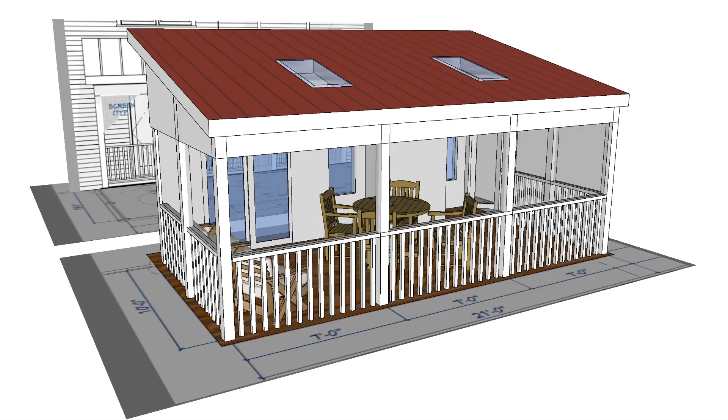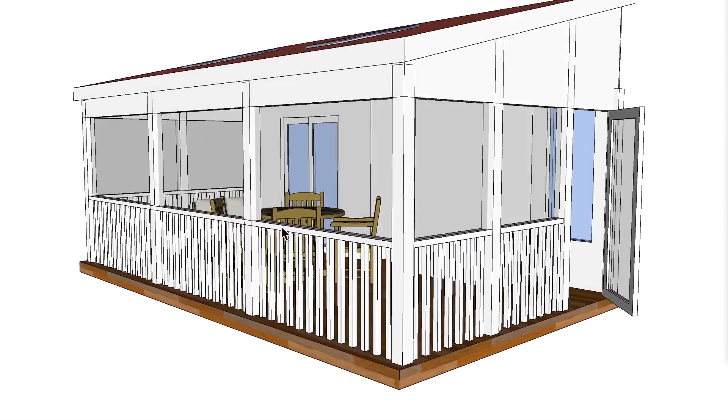Now let's get heating. All right, so here we have this covered patio with a screened-in room area. This is a residential application. Let's go ahead and look at any obstacles we might have. So first of all, we have a fan here in the center, and then we also have some, I believe, recessed lighting fixtures inside here.

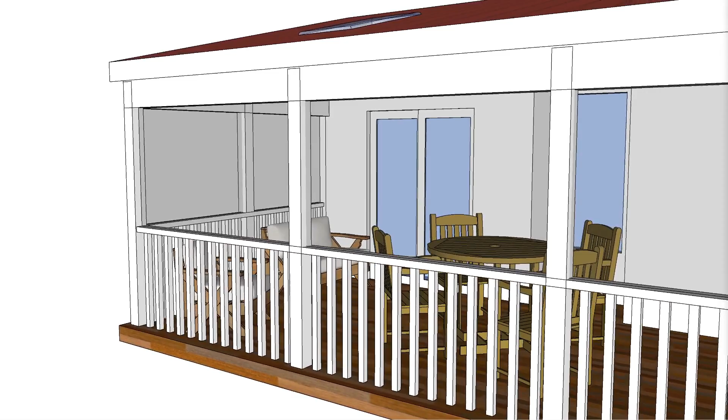And then also we do have a doorway that slides left to right, and of course there are screens on this screened-in patio. I'm going to go ahead and turn off the screens. It's just easier for me to maneuver through there, but there are screens there. We have some skylights up here that we need to be aware of. Obviously, we don't want to obstruct the lighting coming in from the skylights as well.

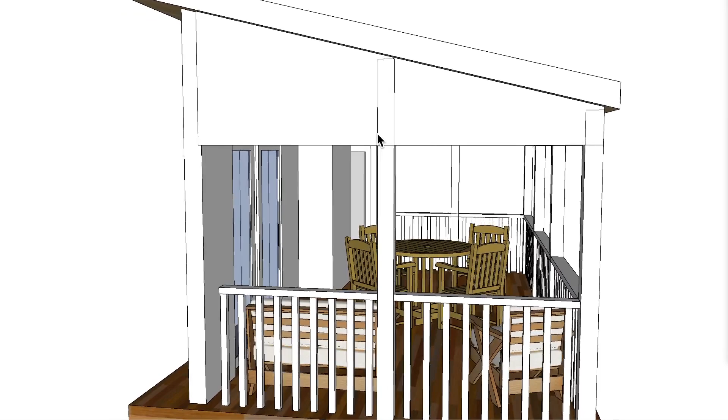So not sure about the configuration of the side elevation right here, for instance. This could be open, it might be closed like I show it here, but hopefully it'll be closed so that we can make some attachment points. So if that's changed, we'll come back and rearrange that.

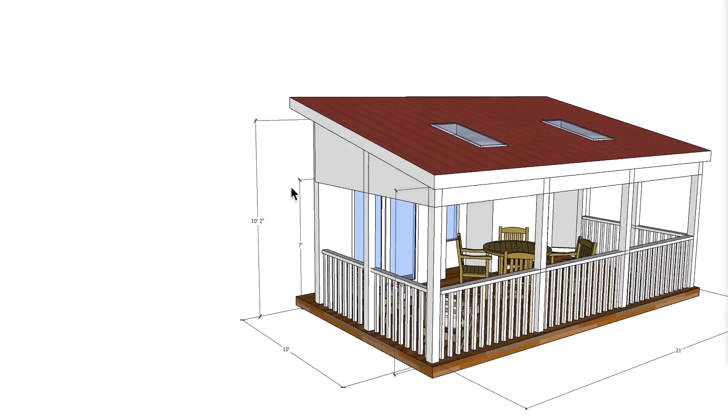So all right, let's go ahead and look at the overall dimensions here. Basically, we've got 21 feet by 10 feet. We have a height at the top of the ceiling up here, which would be inside here, I have that at 10'2", and the ceiling height right here, I have it 7'8" 3/8. Back here, I have the doorway at about 7 feet off the finished floor, and then we do have the swinging door that goes to the outside as well. And I think that's about it.

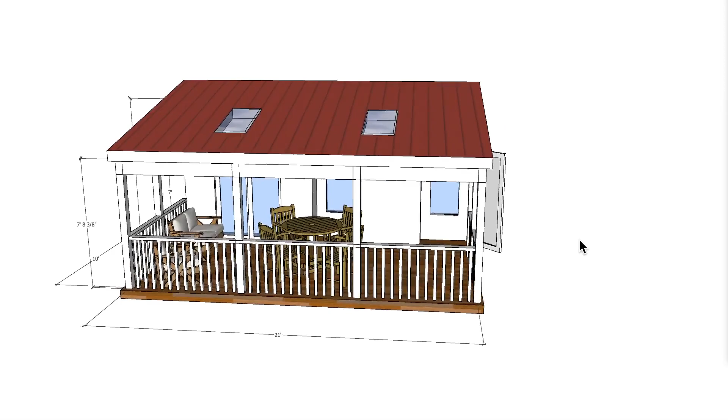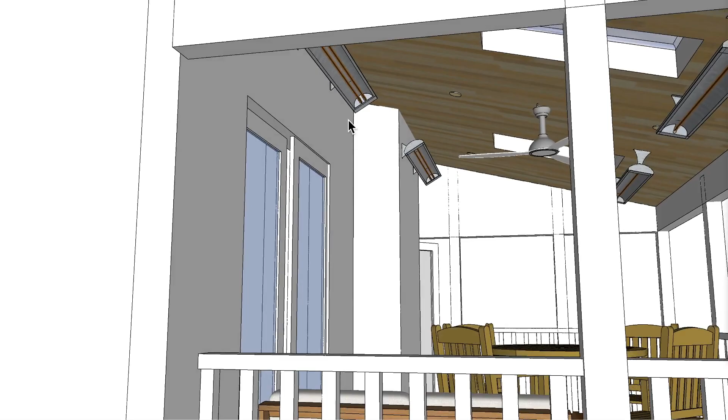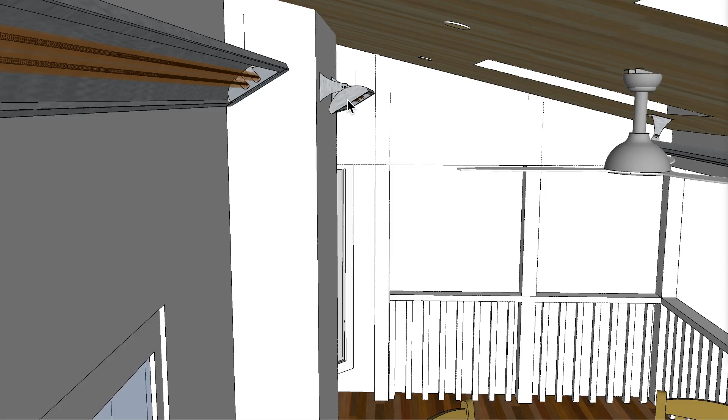So let's go ahead and turn that off and go with the first option that I looked at as a possibility, and that would be to mount some units similar to this. So what I have here is two of the CD 6,000 watt units. I have them at a higher elevation. I've taken the heater itself, and from the top of the heater up is 12 inches. I have this at a tilt, from straight down, it's 30 degrees, sorry about that. From straight down to the ground, 30 degrees up.

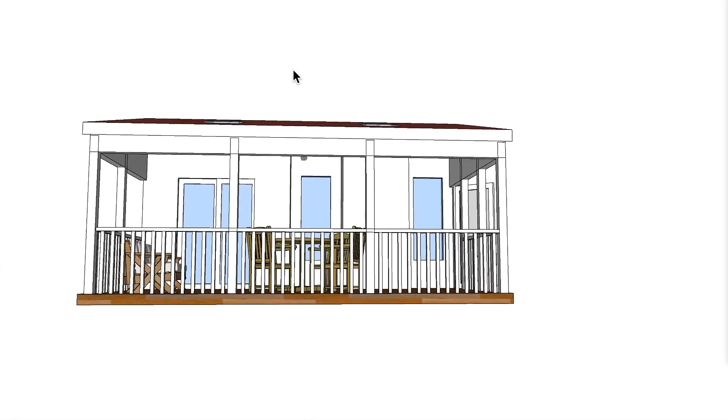And also just note that, because the ceiling height is a little bit higher up here, I was able to move this one up just slightly higher than this one over here based on the fact that there's a drop right there. So those are two 6,000 watt units. The placement of those two units is 4.5 feet from center of the room to center of the heater, and from center of the room this way, 4.5 feet center of the room to center of the heater.

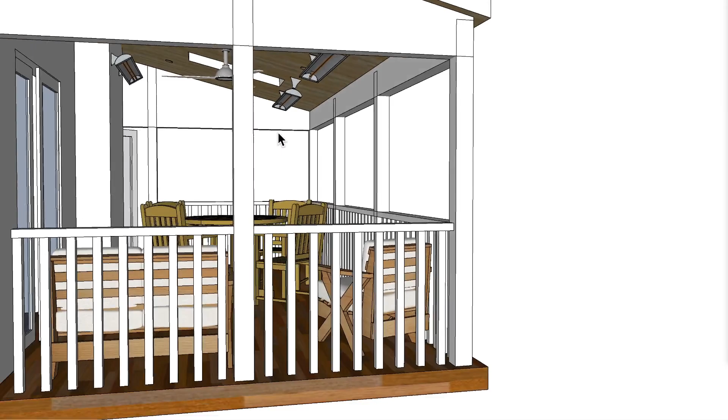And then over here, what I've done is taken two 4,000 watt units. I chose the 4,000 watt units just because of the fact that they are going to be slightly lower than this, almost a foot lower. What I've done here is made sure we're at the same slope as the ceiling. I have the same slope with the contour of the bottom of the heater itself. So I'm using the OEM bracket on that.

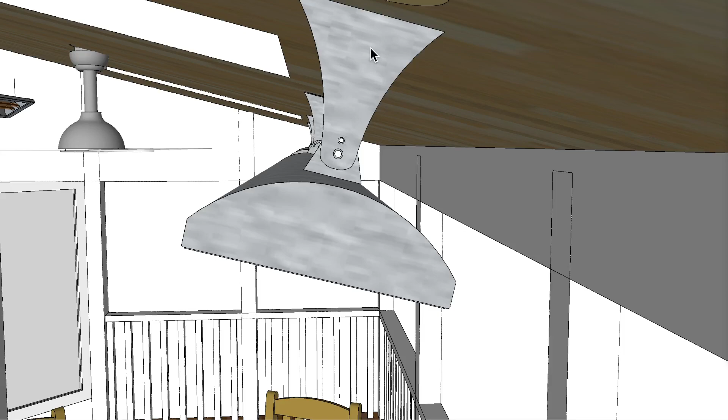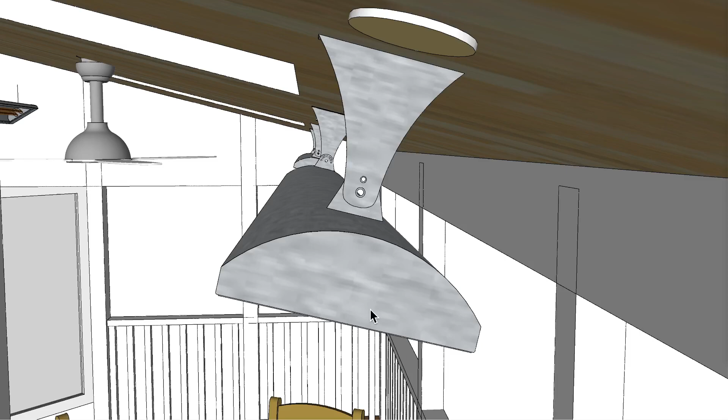You may have to adjust that and go down a slight bit in order to achieve a better clearance. The manufacturer says that if the heater is angled, it needs to be at 12 inches, but they don't mention whether it's flush with the ceiling like this, or whether you have to change that angle down to a further drop, which would be the 12-inch drop. Right now you see a 6-inch on this side here.

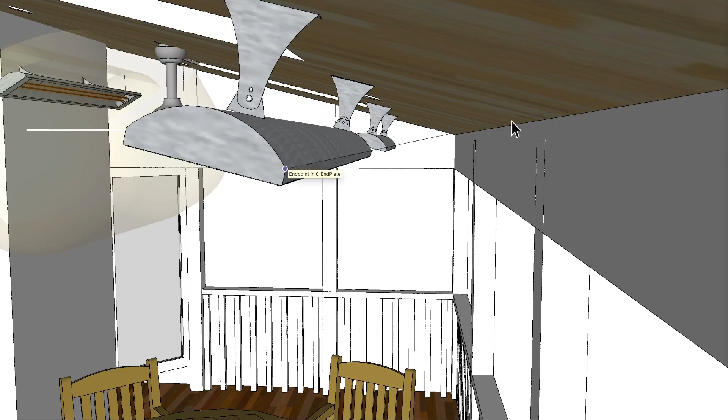Let's go ahead and look at the clearances below the heater. I don't have that on here, but essentially what I have here is 18 inches of clearance. So let me go ahead and just mark that real quick. So we'll call it from this edge here, going straight down. Let's see here. Yeah, actually I have it a little bit further than 18 inches. So we just need 18 inches.

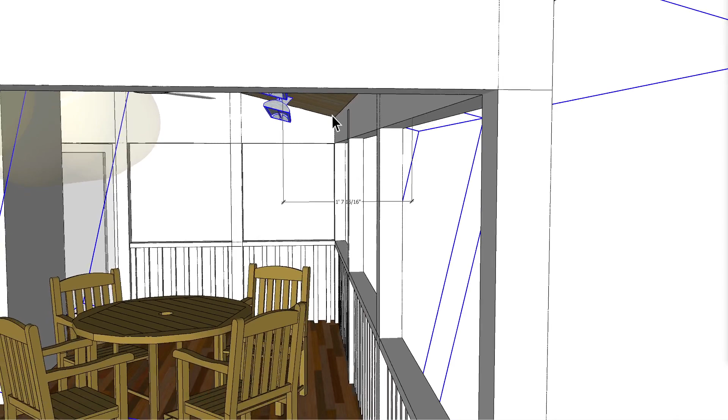Let's go ahead and see if we can move that. We'll go with maybe 3 inches down this slope here and see how that looks. So we'll go with 2 inches, and that should be perfect there. So yeah, there's our 18 inches of clearance from this edge over here to the bottom side of the heater itself.

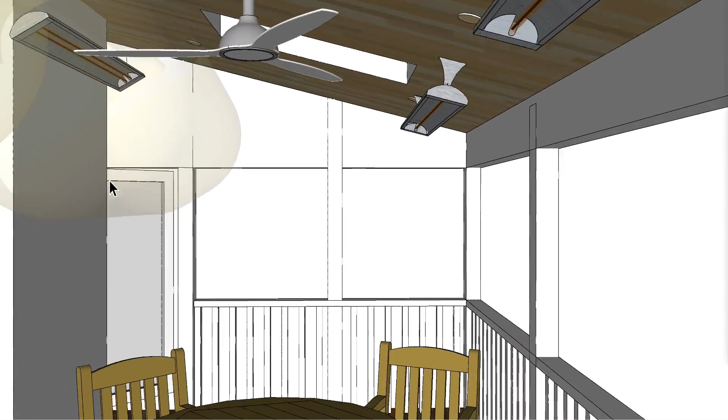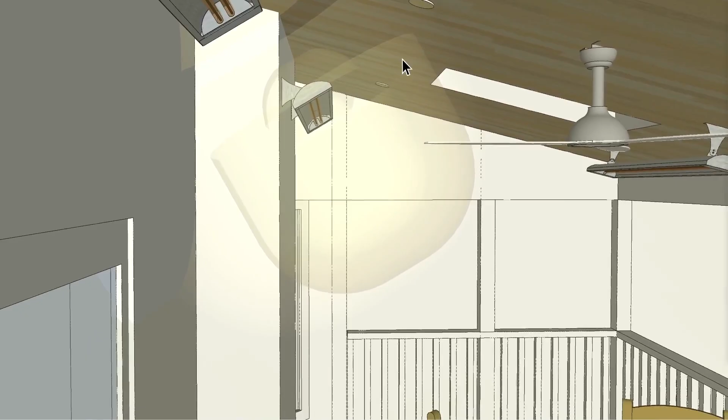So similar to this here, what we have is 36 inches straight down from the heater, 18 inches from the edge here. When it's at an angle, the manufacturer states it's okay to have this clearance here, as long as you meet the 12 inches of clearance above the heater. So looking back over here, we've done the same exact thing.

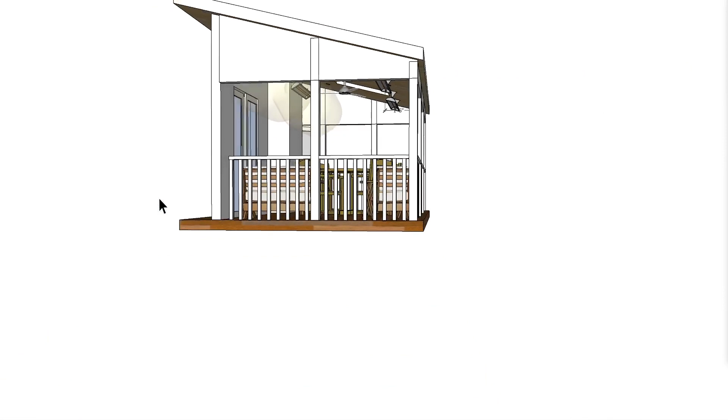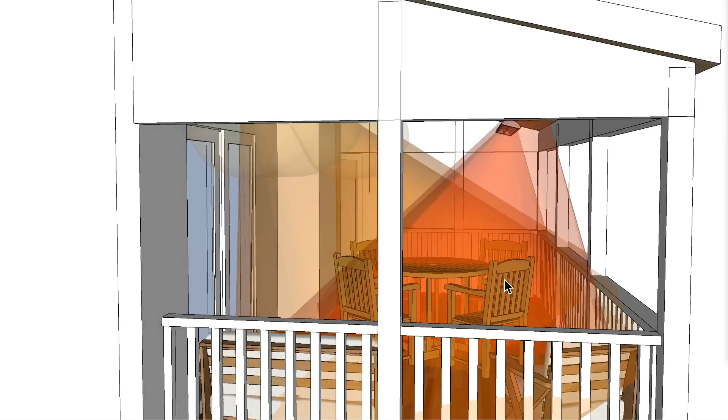Only difference is this a 4,000 watt unit versus 6,000 watt units over here. So let me turn that off, and I want to show you the footprint of heat with this layout. This is probably my preferred layout for the most uniform and the warmest type of application for something like this. You can see here that we're getting a very good coverage throughout the whole entire span.

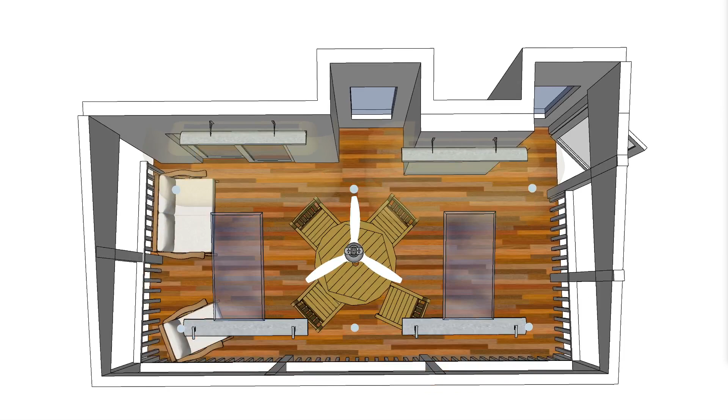Let me just take that off, and you can see we do have those light fixtures here, so that might be an issue with regards to this one and this one here. But this is probably the best layout as far as heat is concerned. So that would be number one. Let's turn that off and look at a different option. A different option would be going with 4,000 watt units.

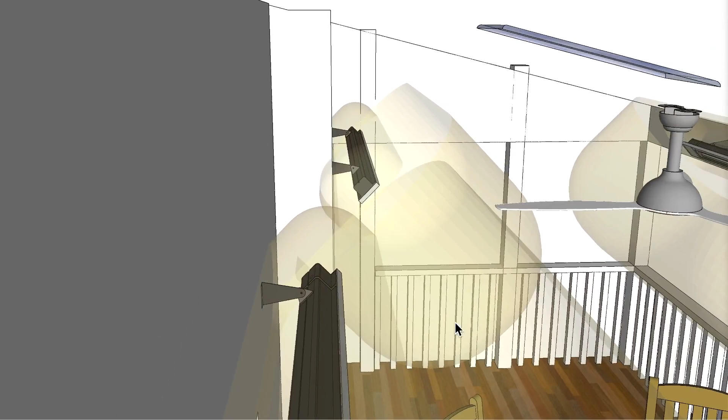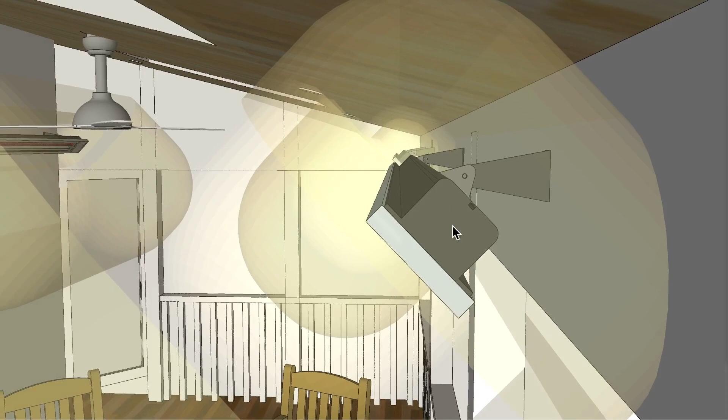These are slimline units. Slimline units don't require the same clearance above when you angle the heater. However, the heater itself can only come down 45 degrees. So if I pointed the heater straight out and then dropped it 45 degrees, this would be the angle of the heater, and the same is true over here. The nice thing is when I pop that ceiling back on here, we only need 6 inches of clearance with that 45 degree tilt, and 6 inches of clearance would be maintained all around with the OEM bracket, and then 18 inches below the heater itself, and that's not a problem.

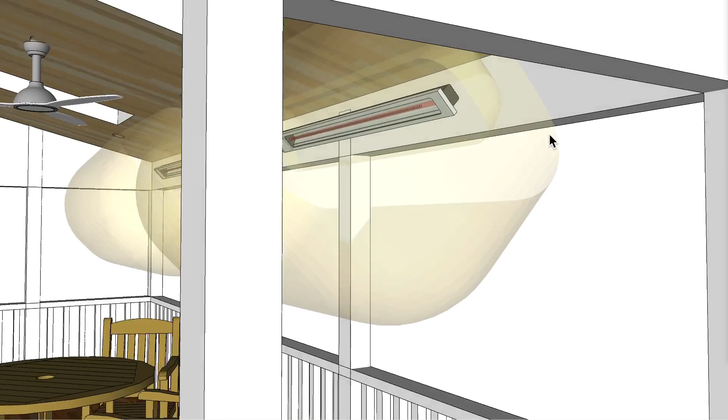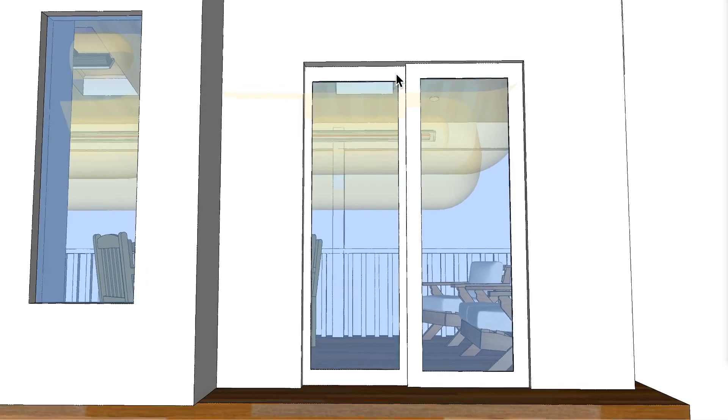This is just clearances to combustibles. So at the angle, this wall here, or this item right here, is not an issue. Same with the wall over here. Also, I should mention I moved this up 4 inches higher, just so we can eliminate the view of the heater from this point of view as much as possible. You can see that right there.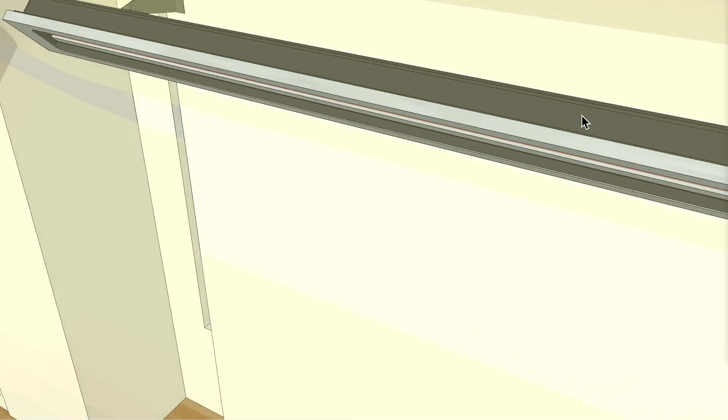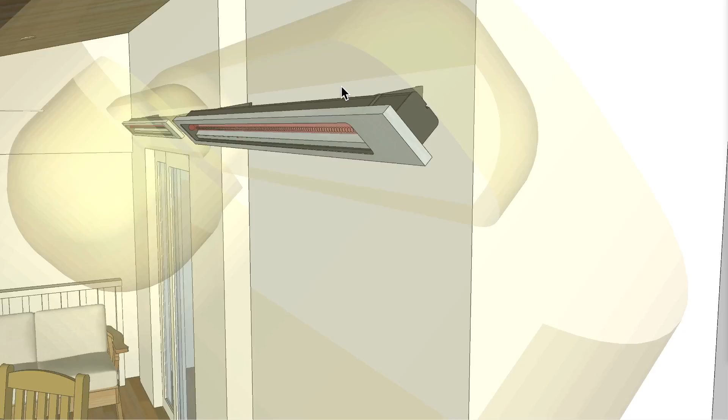And also I should mention that the brackets themselves can be pushed to the left or right in order to attach this at a proper point. Just to look over here, we have the channel in the back of the heater where there's a bolt that slides back and forth, so you can maneuver this bracket left and right wherever you see fit, provided that you don't exceed the manufacturer's recommendation of the distance that you can go on this side from left to right, and on this side from right to left. So bear that in mind, and let's look at the footprint of heat.

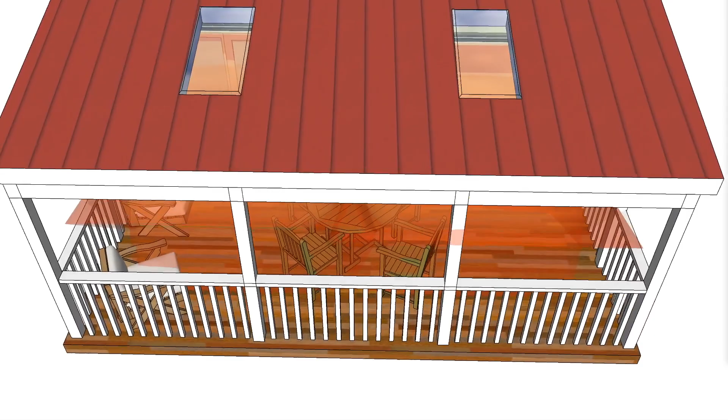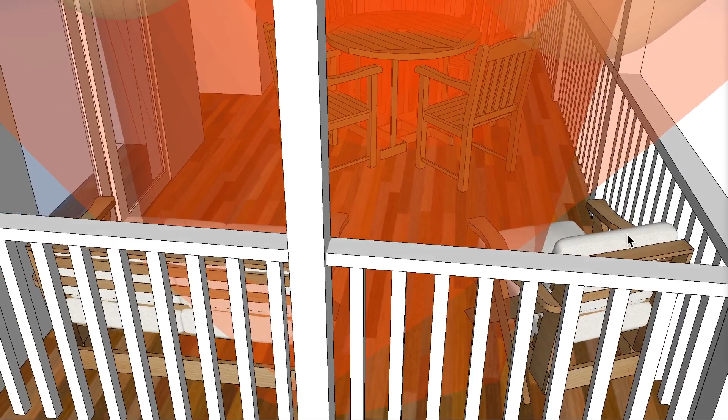So footprint of heat, we're going to turn this off again. And again, you got a really nice footprint of heat throughout this whole span. This would probably be another preferred application. The only thing I don't like about it is that with the 45 degree tilts, you don't get that coverage right below the heater. So if you're sitting right here, you're going to get some heat from this side here, but you're not going to really feel it that much from right here. If the majority of the seating is mostly in the center, this would be a perfect application.

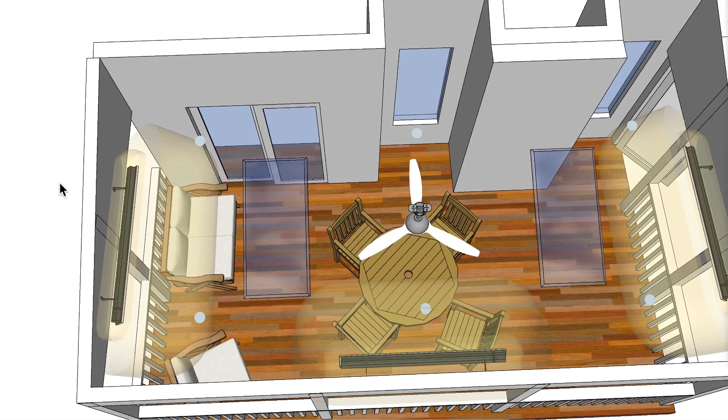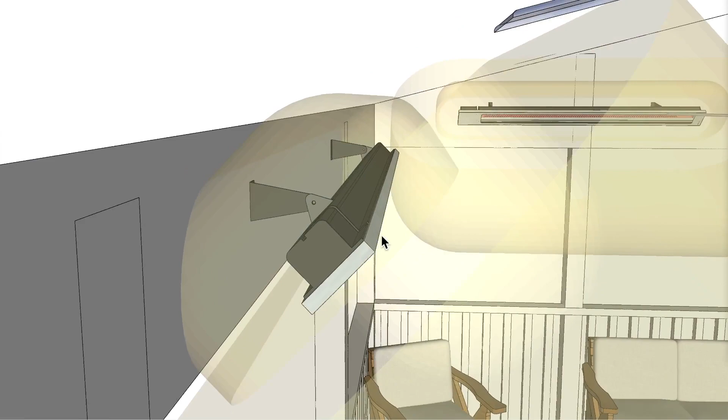All right, let's look at the final application that might work, and that's placing three 4,000 watt slimlines, one on each external wall over here, at 45 degrees. You need to make sure that you're maintaining the 18 inches of clearance on this side as well as this side, and on all sides of the application. 6 inches of clearance again from this top edge of the heater to the ceiling, and we'll put that on just so you can see this would be the 6 inches from here to here. And the 45 degree tilt is the max tilt.

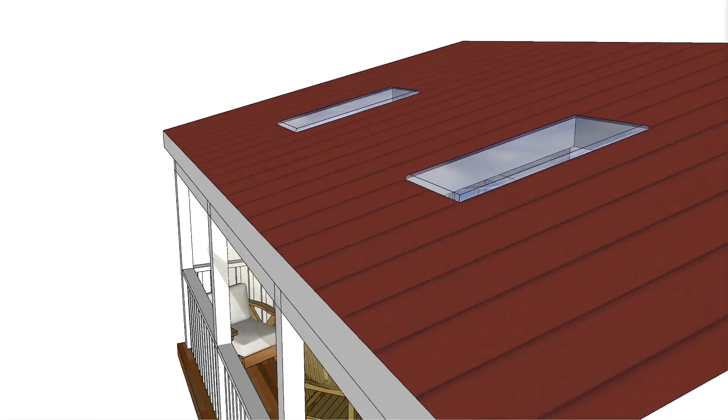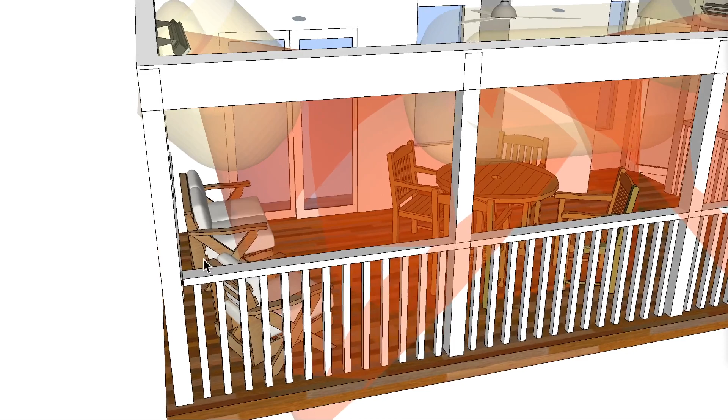So let's look at that footprint of heat, and footprint of heat looks fairly decent. It's a pretty good coverage. I would say the only thing I don't like again is the fact that the 45 degrees will not allow you to heat this edge of the patio. I'm not quite sure if this is the actual seating positions of this application, but if this is, you need to consider that.

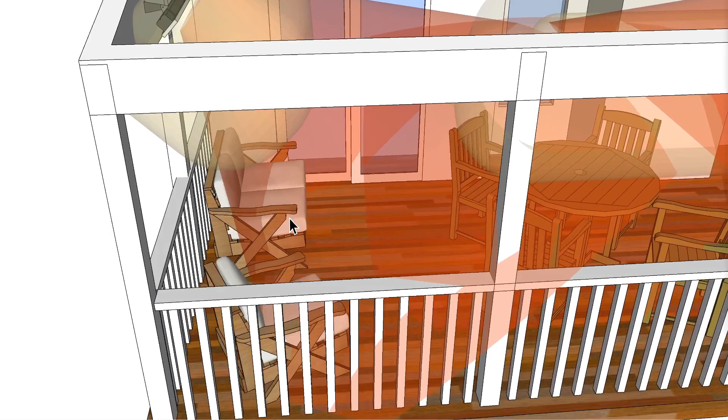Now on a colder day, you may wish to push this chair forward a little bit, maybe just 2 feet is all you're going to need, or just a foot and a half. Let's just go with 12 to see what that looks like. So 12 inches would give you an adequate footprint of heat on top of that seating position. So on those cold days where you really want to warm up, you can just maneuver some of the furniture around and make that a little bit more feasible for your application. All right, well, I hope this has helped.